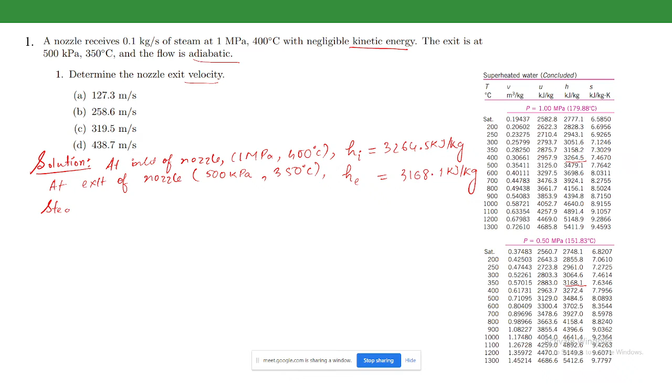steady flow energy equation, we will be referring to it as SFEE in the rest of the session. So what is the steady flow energy equation? This is the energy balance for an open system in which there is a flow of mass, but it is steady, that is there is no buildup of energy or mass within the system.

So if we write the steady flow energy equation, ... g V_e squared by 2 plus g Z_e. So what are the salient terms here? This is the heat transferred into the system. This is the mass multiplied by these specific values, which give the flow energy related to the mass that is coming into the system, that is at the inlet. This is the work done by the system. And this is the flow energy of the mass that is leaving the system, that is at the exit.

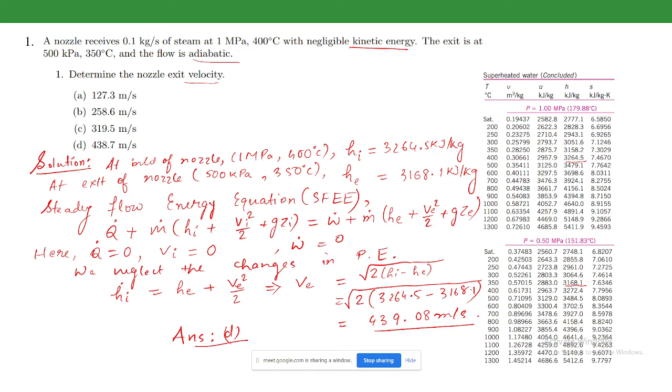Okay, so was this clear to everybody? If there is a doubt, please ask. So no queries, I guess. Okay, so then let me move on to the next problem.

So this is a continuation of the previous problem, that is, we have to find the nozzle exit area. So for this, see, at the nozzle exit, that is at 500 kPa and 350 degrees Celsius, from the table we can find that the specific volume is 0.57015. So the specific volume at the exit is 0.57015. We know that the mass will remain constant at both the inlet and the exit, that is, mass flow rate at the inlet is equal to mass flow rate at the exit. It is a steady flow system.

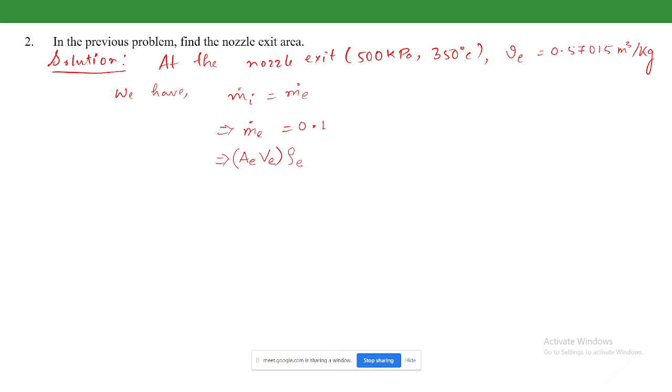So the nozzle receives 0.1 kg per second of steam. So the mass flow rate at the exit will also be 0.1 kg per second. So how can we write it? This is area at the exit times velocity at the exit, the volume flow rate, and if we multiply it by the density of the steam at the exit, it gives the mass flow rate at the exit. So this is 0.1. Now Ae Ve, and what is the density? Density is 1 upon the specific volume. So Ae is equal to 0.1 into ve divided by Ve. This is the specific volume, this is the velocity. Be careful with this.

So 0.1, 0.57015, and velocity we have found is 439.08. So the area will come out as 0.000129 meter square. All these units are in SI units, so this will be in meter square. So we can write it as 1.29 centimeter square. That is the area of the nozzle at exit.

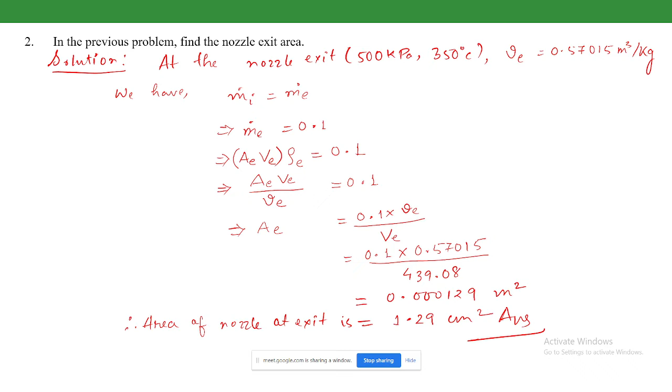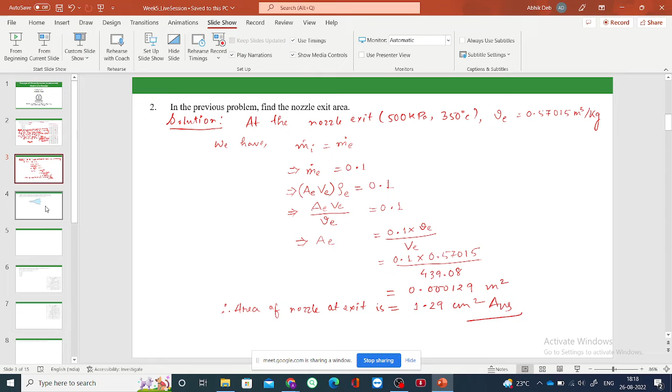Okay, so is it clear to everybody? Yes, sir. Okay, so if there is any doubt, please ask. Okay, so let me move on to the next problem.

Okay, so the figure shows a diffuser. So what is a diffuser? This is the opposite of a nozzle. The nozzle has a decreasing cross sectional area, and a diffuser has an increasing cross sectional area. It can be a gradual increase, a tapered section, or it can be a section in which the increase in area is not constant. So anyway, let us move to the problem.

The diffuser shown in the figure has air entering at 100 kilopascal and 300 Kelvin with a velocity of 200 meter per second, and the inlet cross sectional area of the diffuser is 100 millimeter square. So the inlet conditions are almost all given, and at the exit the area becomes 860 millimeter square, and the exit velocity is 20 meter per second. We have to determine the exit pressure of air. So let us start with the steady flow energy equation here.

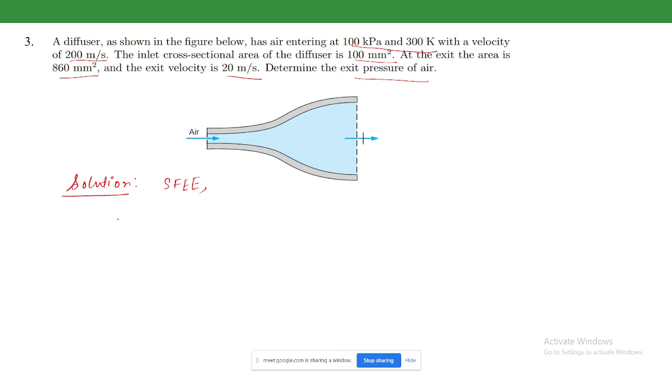If we write the steady flow energy equation, that is Q dot plus m dot (hi plus vi square by 2 plus gzi) is equal to W dot plus m dot (he plus ve square by 2 plus gze). Okay, so here for a diffuser, both the heat transfer and the work done by the system are 0.

So here this is 0, this is also 0, and we neglect the changes in potential energy. So essentially, this is 0, this is 0, m and m gets cancelled, and we neglect the changes in the potential energy. So hi plus vi square by 2 is equal to he plus ve square by 2.

So we can say that hi minus he will be equal to ve square minus vi square by 2. So this will be what? It has an exit velocity of 20, so 20 square minus inlet 200 square, by 2, and this comes out to be 19800 in magnitude.

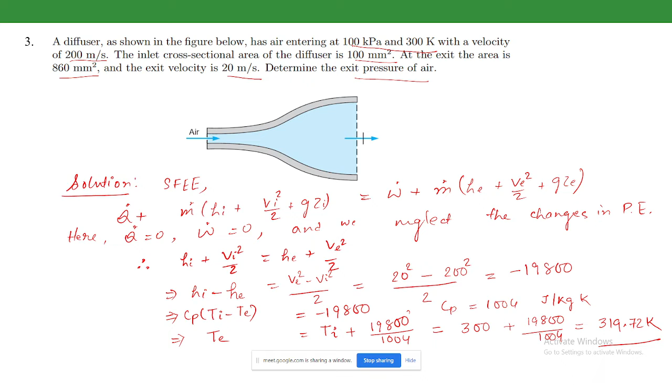So we have to determine the exit pressure. Exit pressure is equal to inlet pressure multiplied by Ai by Ae multiplied by Vi by Ve multiplied by Te by Ti. If we put in the values, the inlet pressure is 100 kPa. Area at the inlet is 100 and the area at the exit is 860. Since both the units are same, we did not convert to SI units because numerator and denominator units will get cancelled.

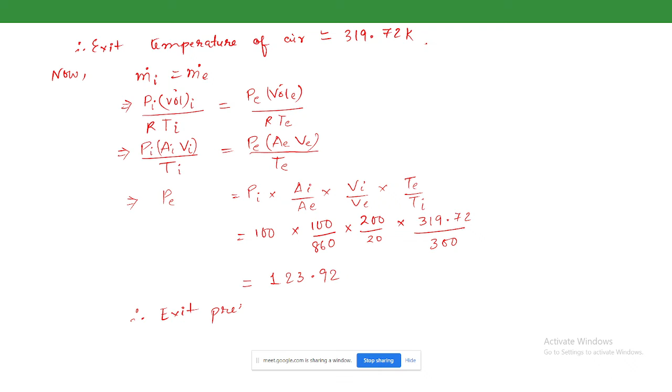And the velocities, the inlet velocity is 200 and the exit is 20, so this is 200 by 20, and this is the exit temperature that we have found, 319.72, over 300. So the pressure will come out to be 123.92. Therefore the exit pressure of air is 123.92 kPa. So this is the answer.

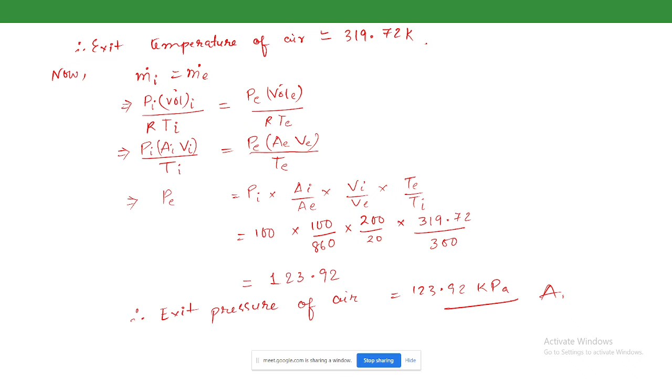So I hope it is clear to everybody. Is it clear to everybody? Yes, sir. Okay, thanks for the response. We will next move on to the next problem now.

So the next process is essentially a throttling process. It is R134A. Can anybody say what is R134A?

Anybody? You can please unmute and say if you know. Hello, sir. It is a type of refrigerant. Okay, yeah. Do you know what its name is? I think it should be ammonia. No, not ammonia. So it is basically tetrafluoroethane. No, it is not ammonia. So it is basically R134A.

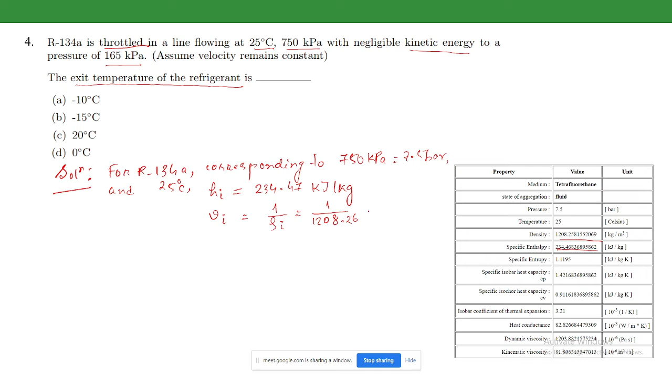This is kilojoule per kg, and the specific volume at the inlet is 1 upon the density at the inlet, that is 1 upon 1208.26, which comes out to be 0.000827 meter cube per kg. If we write the steady flow energy equation for this throttling device: Q dot plus m dot (hi plus Vi squared by 2 plus g zi) equals W dot plus m dot (he plus Ve squared by 2 plus g ze). It enters with negligible kinetic energy.

And the velocity remains constant, meaning Vi and Ve are same. Since there is no heat lost or work done, under the conditions Q equals 0, W equals 0, Vi equals Ve, and assuming the change in potential energy is nearly 0, we reach hi equals he. This is a very important equation for the throttling process: the enthalpy at the inlet and exit essentially remain constant.

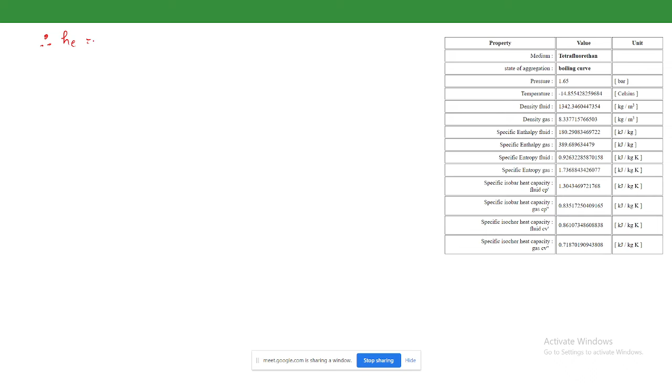Okay, so therefore the enthalpy at the exit is equal to the enthalpy at the inlet, 234.47 kilojoule per kg. Now, what is the condition given at the exit? At the exit, only 165 kPa is given. So 165 kPa.

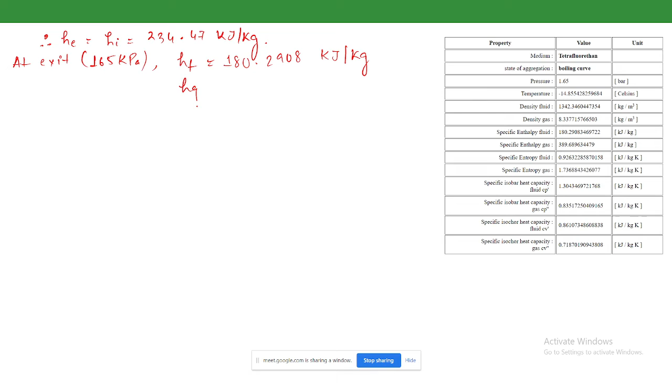The enthalpy of the fluid. Here you can see that in the saturation zone, the enthalpy of the fluid is what? At the fluid state, that is 180.2908, and the enthalpy of the gas is 389.6896. Okay, these two values. So we can say that the enthalpy at the exit state is between these two values.

So that means that this condition implies that the exit state is in the saturation region. The exit state is in the saturation region, and essentially the temperature that corresponds to this saturation pressure will be the exit temperature. So let us find out what is the quality.

So we can find out the quality as He equals 1 minus Xe times the enthalpy of the liquid plus Xe times the enthalpy of the gas. So the Xe value is He minus Hf by Hg minus Hf. If we put in all these values, it comes out to be equal to 0.2587. And therefore the temperature at the exit state

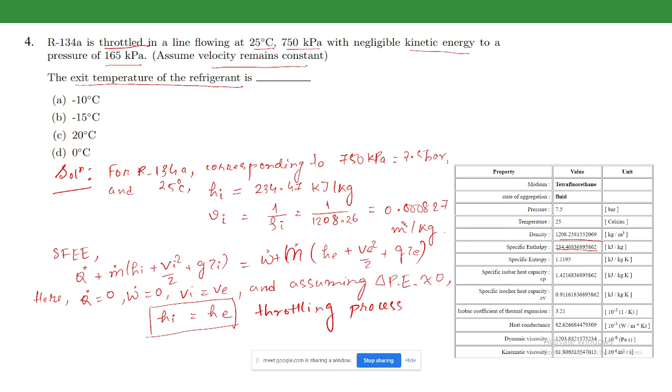So you can see that because of the throttling process, the temperature of 25 degrees Celsius has reduced to a temperature of minus 15 degrees Celsius, which will now be used as the evaporator temperature for the refrigerator. So this is the significance of the throttling process, and option number B is the answer. So was this clear to everybody?

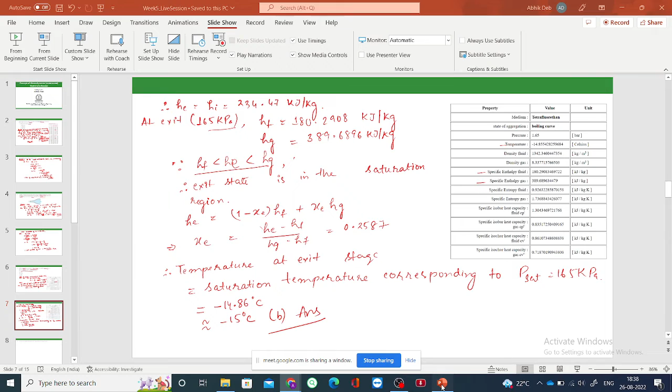Sir, in the throttling process, enthalpy at the inlet is equal to the enthalpy at the outlet. And if the working fluid is the refrigerant, then outlet temperature will decrease. If the working fluid is the ideal gas, in that case temperature will remain constant.

Yeah, you go on. Temperature will remain constant? Yes, since H1 equals H2, and enthalpy is a function of the temperature, therefore temperature should remain constant in case of the ideal gases. Yeah, it will remain constant in case of ideal gas.

So I hope that you have not heard that air is used as a refrigerant in domestic refrigerators, right? Yes, sir. That is the reason why air and other ideal fluids cannot be used, because there will be no temperature drop.

There is another class of refrigeration system, which we call the aircraft refrigeration system, which is used in airplanes. There air is used, and there the decrease in temperature phenomenon is not throttling, so the phenomenon is different. But in throttling process, ideal gases cannot be used for the decrease in temperature.

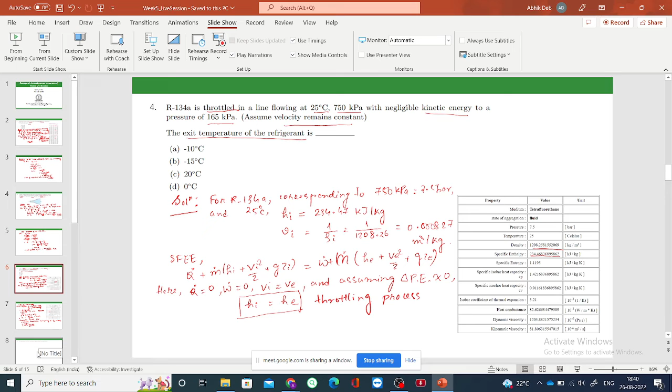Since R134a is not an ideal gas, that is why it will have a decrease in temperature. Okay, does it answer? Thank you, sir. Okay, so we will move on to the next problem.

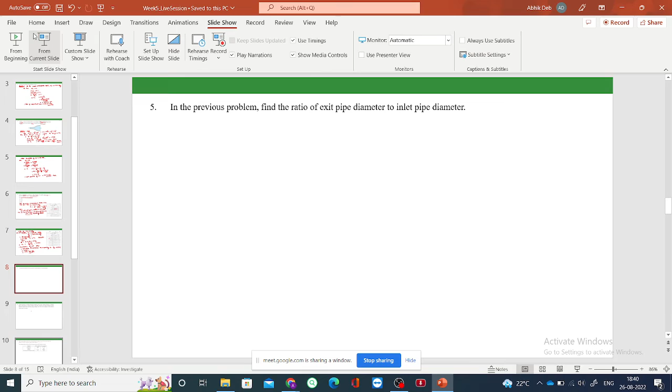So this is a continuation of the previous problem. We have to find the ratio of the exit pipe diameter to the inlet pipe diameter. So at exit, that is 165 kPa.

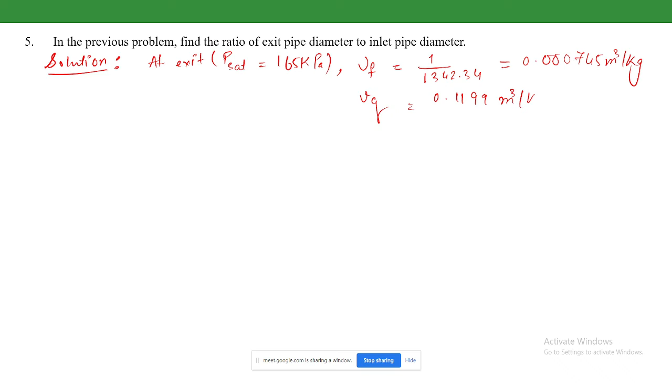From the table, we can see the density of the fluid and the density of the gas are given. So the specific volume values can be taken as reciprocal of those values. So the specific volume of the liquid phase is 1/1342.34; we are just taking the reciprocal of the density values here. So this comes out equal to 0.000745 meter cube per kg, and the specific volume of the gas comes out to be 0.1199 meter cube per kg.

From the previous problem we had found that the quality at the exit is 0.2587. So what is the specific volume at the exit? This will be (1 minus xe) vf plus xe into vg. So if we put in all these values, we will find that the specific volume at the exit is 0.0316 meter cube per kg.

Now, in the entire throttling process, this is a steady flow system and the mass is constant, right? So mass is constant. This implies Ai Vi rho i is equal to Ae Ve rho e. We are equating the mass flow rates at the inlet and the exit. So rho i, again, will be the inverse of the specific volumes. So Ai Vi by vi is equal to Ae Ve by ve.

So we have to determine the ratio of the exit pipe diameter to inlet pipe diameter. So Ae by Ai is equal to Vi by Ve into this value. In the problem it was stated that the velocity remains constant at the inlet and the exit. So Vi is equal to Ve. And this can be written as pi by 4 de square over pi by 4 di square. So this is essentially 1, so this will just be ve by vi, the ratio of the specific volume at the exit to inlet.

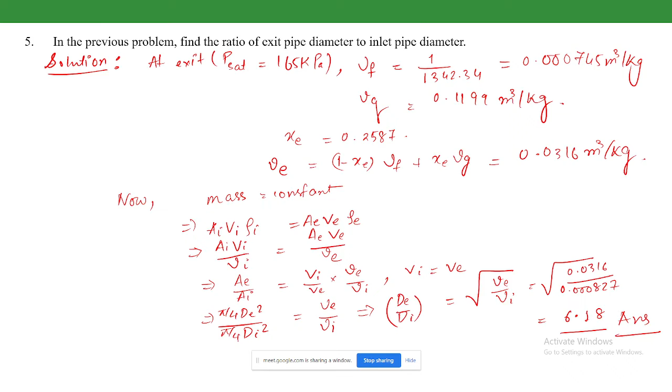Okay, so I hope this is clear. If it is, then we will move on to the next problem. Yes, sir. Yeah, go on. Okay, sir. So fine. Let me move on to the next problem then.

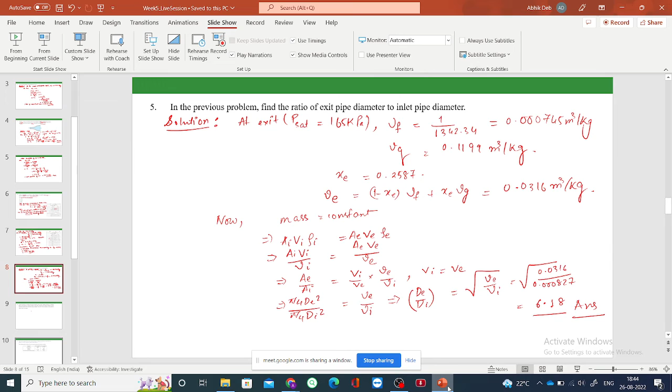Okay, is there any doubt? Is there any doubt? No, no, sir. Okay.

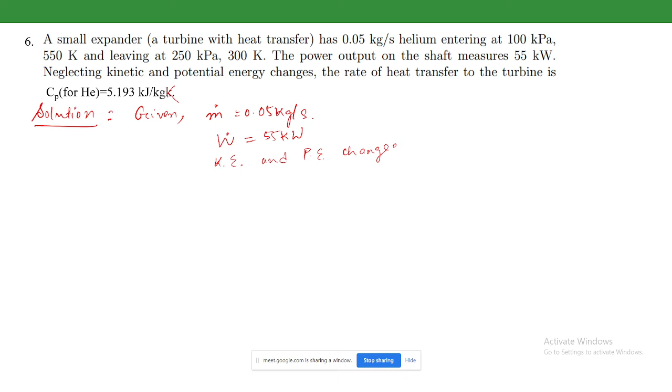So this will essentially be capital K, Kelvin, a printing error. So what are the given data? Given is that the mass flow rate is 0.05 kg per second, and the work done is 55 kilowatt, and the kinetic and potential energy changes are to be neglected.

So the SFEE, the steady flow energy equation, essentially becomes Q dot plus m dot (hi plus Vi square by 2 plus g zi) equals W dot plus m dot (he plus Ve square by 2 plus g ze). Kinetic and potential energy changes are neglected. Since we have to determine the rate of heat transfer, we have to determine the value of Q dot. This is equal to W dot plus m dot (he minus hi).

So considering helium to be an ideal gas in which the Cp does not essentially change in this temperature range from 300 Kelvin to 550 Kelvin, we can say that this is 55 into 10 to the power 3 plus m dot Cp (Te minus Ti). Okay, so just put in the values.

M dot is 0.05, Cp is 5.193 into 10 to the power 3, and for the temperature difference, the exit temperature is 300 and the inlet temperature is 550. So this is essentially 55 into 10 to the power 3 minus this value, which comes out to be 64.9 into 10 to the power 3. So this is essentially minus 9.9 into 10 to the power 3.

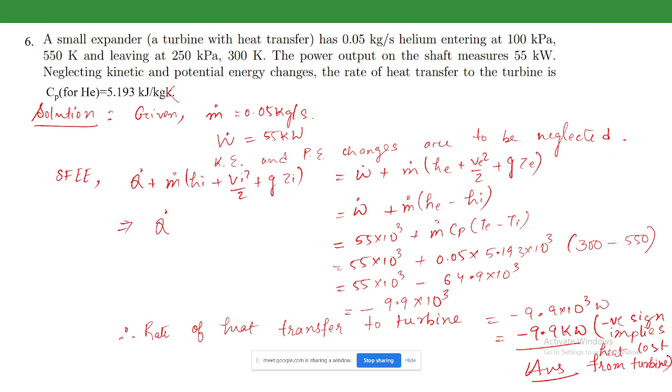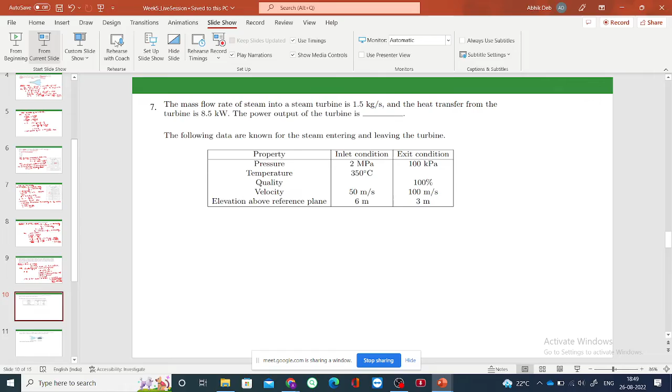Okay, so I hope this is clear. This was a very simple problem. Is there any doubt? If there is no doubt, then I will move on to the next problem. Okay, let me then move on to the next problem.

Okay, so it is also a turbine problem in which the mass flow rate of steam into the steam turbine is 1.5 kg per second, and the heat transfer from the turbine is 8.5 kilowatt. It says the heat transfer from the turbine, that is, heat is essentially being lost from the turbine. And we have to determine what is the power output of the turbine. The properties are given at the inlet and the exit conditions.

So at the inlet condition, it is 2 megapascal, 350 degrees Celsius, and the velocity and elevation are given, and at the exit condition, it is 100 kilopascal, and the quality is 100 degrees. Sorry, 100%. A quality of 100% implies that the condition is saturated vapor, right? We have already discussed when the quality is 100%, it is saturated vapor, and when the quality is 0%, the state is saturated liquid, and the velocity and elevation are also given here.

So the solution: the given condition is the mass flow rate is 1.5 kg per second, and the heat transferred from the turbine, that is coming out from the turbine, is heat loss, so it is minus 8.5 kilowatt. And at the inlet, the velocity is given as 50 meter per second, the elevation is given as 6 meter.

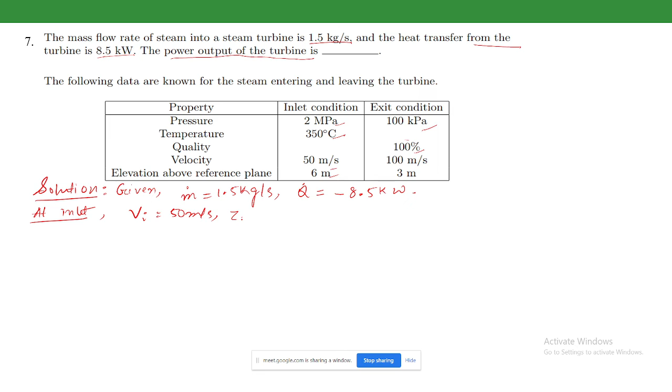At 2 megapascal and 350 degrees Celsius, this will essentially be in a superheated region. If we see the property table, the inlet enthalpy will be equal to 3136.96 kilojoule per kg. And at exit, the velocity is given as 100 meters per second, and elevation is given as 3 meter, and since x equals 100%, that implies saturated vapor state.

So therefore at saturation pressure of 100 kPa, the enthalpy at the exit will be the enthalpy of the gas at that state, and that is equal to 2675.5 kilojoule per kg. So now we write the SFEE.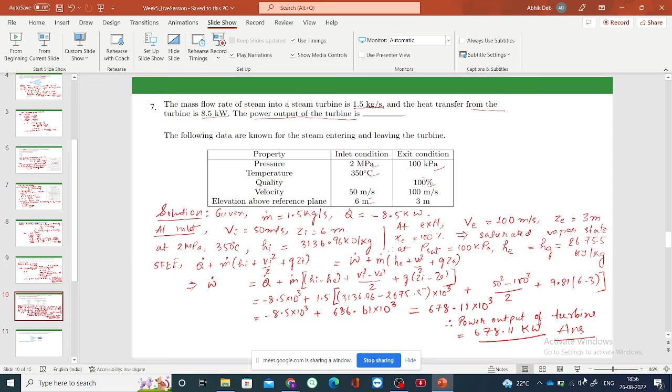So is it clear to everybody?

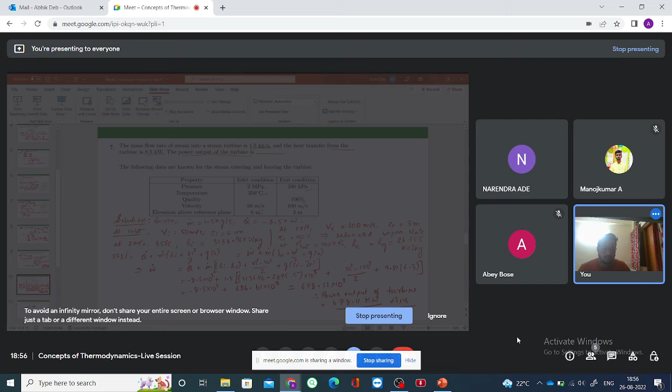Yes, sir. Okay, then we will move on to the next part of the problem. Okay, so

now this is an air compressor which takes in air at 100 kPa and 17 degrees Celsius and delivers it at 1 megapascal and 600 Kelvin to a constant pressure cooler in which the air exits at 300 Kelvin. So we have to find what is the specific compressor work input. Now at state 1, this is for air. From the property chart of air at 100 kPa and 17 degrees Celsius, the enthalpy value is 290.17 kilojoule per kg.

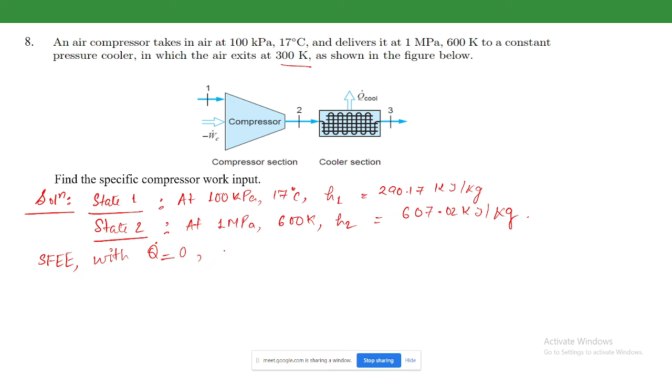And at state 2, at 1 megapascal and 600 Kelvin, the enthalpy value for air is 607.02 kilojoule per kg. Now if we write the SFEE, there is no heat transfer, so Q will be 0, and neglecting the changes in potential energy and kinetic energy, the SFEE will take the form we can see here. This is 0, and the kinetic and potential energy changes are also neglected.

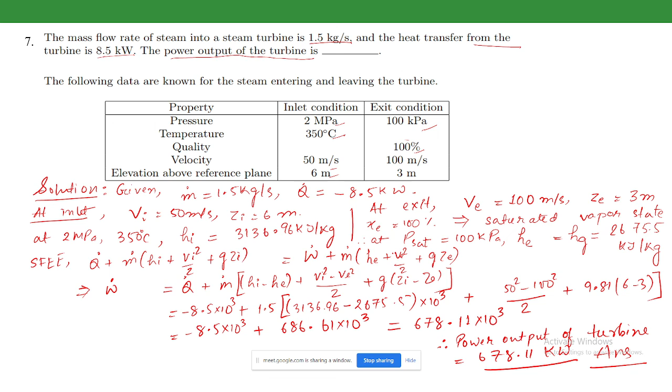So W dot will be m dot (Hi minus He). So W dot by m dot is equal to Hi minus He. This is 290.17 minus 607.02, which is minus 316.15. This negative sign indicates this is essentially a compressor, right? So work will be done on the system, that is, work is done on the compressor to compress the air. So the negative sign indicates work done on system.

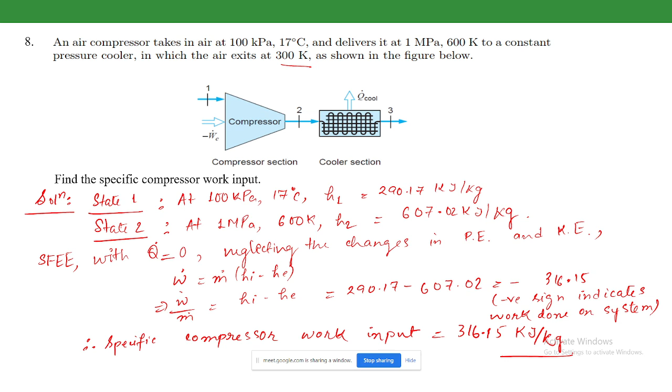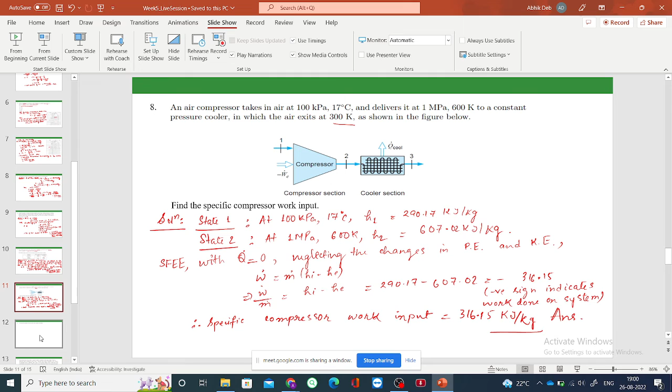Therefore the specific compressor work input, specific meaning per unit mass, is already taking care of the negative value, so it is just 316.15 kilojoule per kg. So this is the answer. If this is clear, then we will move on to the next problem. If any of you has any doubt, you can ask. Okay, so if there is no doubt, then let me move on to the next problem.

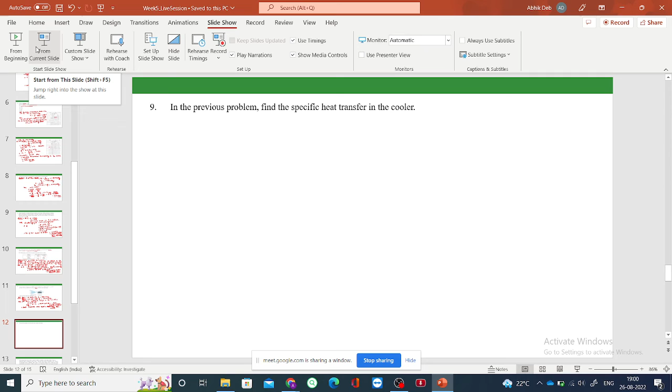It is a continuation of the previous problem, and we have to find the specific heat transfer in the cooler. For the cooler, you can see the inlet is state 2 and the exit is state 3. Since it is given that it is a constant pressure cooler, since the cooler is a constant pressure system,

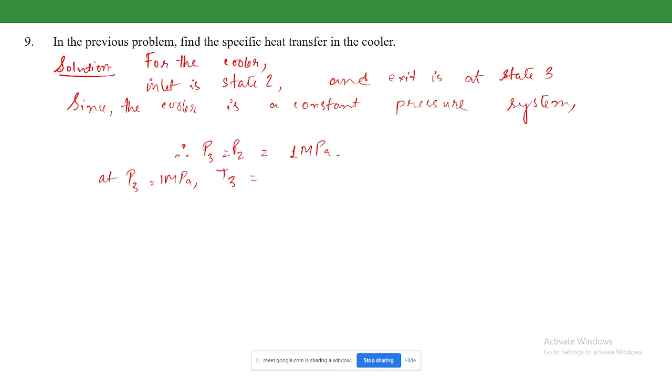therefore P3 is equal to P2 is equal to 1 megapascal, and at P3 equals 1 megapascal and T3, the exit temperature, given as 300 Kelvin, the enthalpy value for air will be 300.19 kilojoule per kg. Now if we again write the SFEE, there is heat loss, but there is no work in this section, and the kinetic and potential energy changes are neglected. So with no work done and changes in kinetic and potential energy considered to be 0, the SFEE will become this.

So this is the mass flow rate. Oh, we have to find the specific one. Sorry, we have to find the specific heat transfer. So this is Q dot by m dot, that is He minus Hi, and He is H3, so H3 minus H2. This is 300.19 minus 607.02, which is minus 306.83. Here the negative sign indicates heat lost from the system, from the cooler, which gives a practical explanation also. It is a cooler and heat is to be lost, so the heat transfer comes out to be negative.

If it is clear, then we will move on to the next problem. Yes, sir. Okay, thank you.

So this is the last problem of today's session. It is stated that two steady flows of air enter a control volume. So there are two flows of air. One is at state 1 and the other is state 2, and they combine here with a given value of heat rejection and some work done by the system, and it comes out at state 3.

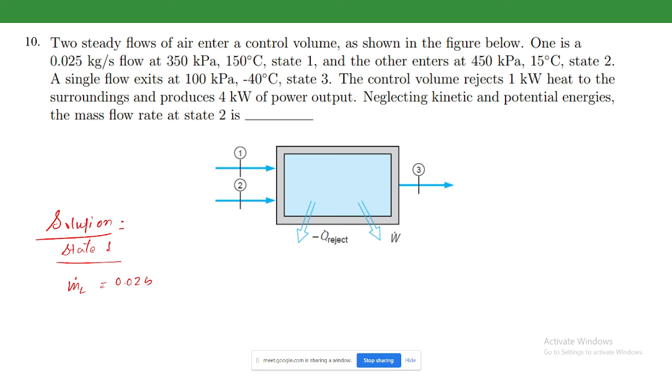So at state 1, we can see that m1 is equal to 0.025 kg per second. The pressure P1 is 350 kPa and T1 is 150 degrees Celsius. We don't need the enthalpy value right now, so we can just do the problem with a constant specific heat value.

So at state 2, m2 dot is what we have to determine. We have to determine the mass flow rate at state 2, which is not given, and the pressure at state 2 is given as 450 kPa, and temperature is given as 15 degrees Celsius.

And at state 3, which is essentially the exit state, m3 will be the sum of the two masses coming in. The combined mass will go out at state 3. And P3 is equal to 100 kPa and T3 is equal to minus 40 degrees Celsius.

It is given that the Q rejection is 1 kilowatt, so it will be minus since it is rejection, and it produces 4 kilowatts of power output. Since it is producing work, the work is done by the system, that is a positive work.

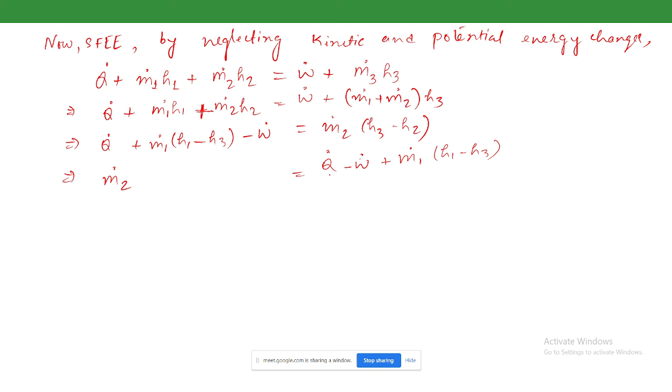Just let me write it first. m2 dot will be equal to Q dot minus W dot plus m1 dot (h1 minus h3), divided by (h3 minus h2).

Now assuming constant specific heat for air as Cp equals 1.004 kilojoule per kg Kelvin, we can write m2 dot as Q dot minus W dot plus m1 dot Cp (T1 minus T3), divided by Cp (T3 minus T2).

So what is Q? If we put in the values, Q is minus 1, and W is 4, so minus 4. These are in kilowatts, and since Cp is also in kilojoules, we are not writing the 10 to the power 3 term here. There will be a 10 to the power 3 in the numerator and in the denominator, so they get cancelled.

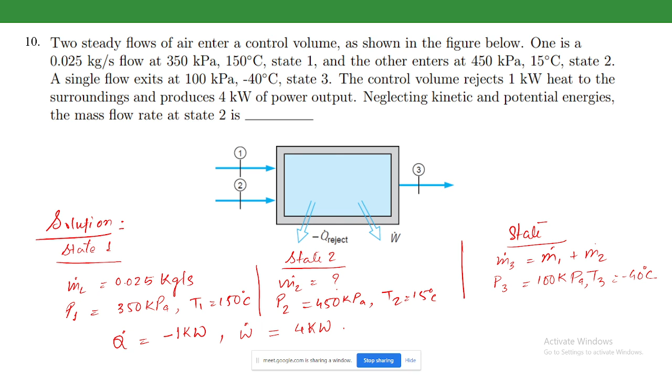So m1 dot will be 0.025 into Cp 1.004 into T1 minus T3, which is 150 minus minus 40. And the denominator is 1.004 into T3 minus 40 minus T2 of 15 degrees. We have not written the 10 to the power 3 terms, because they are in the numerator and the denominator, so they get cancelled.

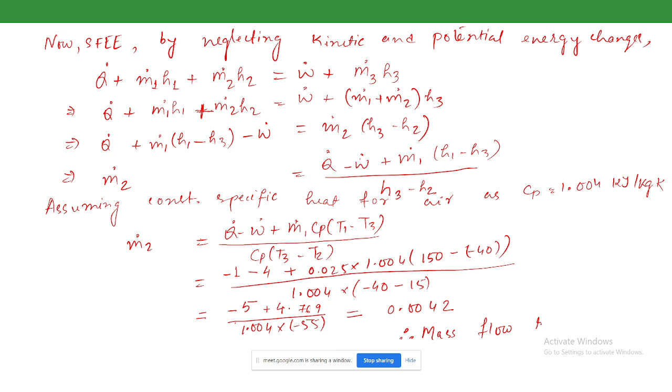So this is basically minus 5, and this value comes out to be 4.769, and the denominator is 1.004 into minus 55. By simplification this value comes out to be 0.0042. Therefore the mass flow rate at state 2 is 0.0042 kg per second. This is the answer.